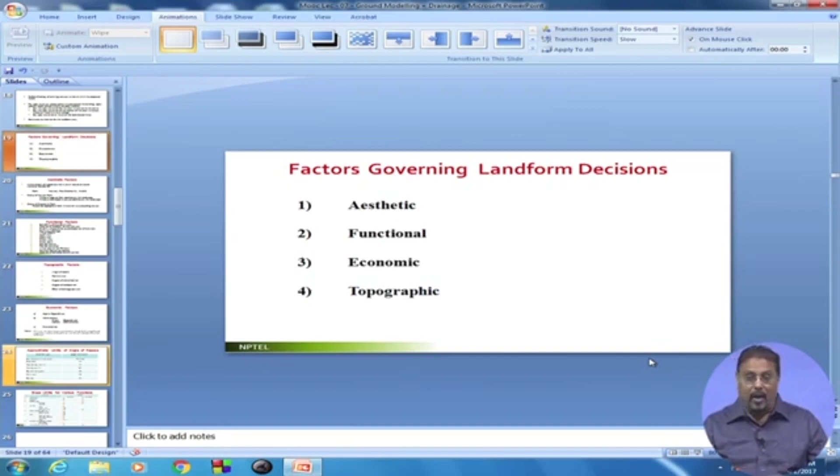But one thing is very true, that since it is a landform and dealing with the soil, whether it is functionally good or bad, aesthetically good or bad, topographic matter will definitely be one of the prime concern. And since landform means you are changing the profiles with the topographic factors, then naturally economic factor also will be very important.

Very bluntly saying, you have a landscape project to be designed which has been commissioned by a client. It has some topography which you want to change. That means you want to do the landform work. The moment you do that and you explain this pictorially to your client, he will be very happy. He will say, yes, wonderful, you please do that.

And then you painstakingly work it out, estimate the earthwork, estimate the costing of it, and then you go back to the client saying that okay, it's going to cost you about say 30 lakhs. Client will say, dump it, don't do it, don't have to do anything. I cannot spend 30 lakhs just for changing my levels. This is the irony of these projects.

Okay, the point is, let us try to understand these factors very briefly. How you handle it and what will be your fate in front of your client, time will say. But let us think of it technically and also ideally. Which factors are going to govern when you are going to do the landform decisions? I have listed this in this form, so let me go by that form itself.

Aesthetically, if you look at it, basically any landform work that you do must be based on a good aesthetic, based on sound technical foundation. It should be absolutely technically, geotechnically correct, whatever goodness we are going to give. And also I can tell you, if something is technically perfect, it also is likely to be good looking, and this is phenomenally true for anything.

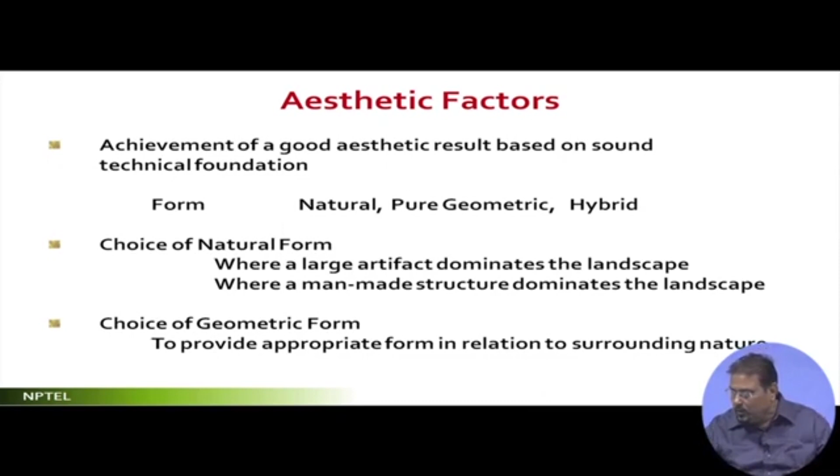Here actually in aesthetics what we are referring to is the form. There are three kinds of forms, two basic kinds. One is the natural form, that means the profile is curved. Whenever we try to explain, we say something which is curvilinear. These are natural forms. And something which can be explained through geometry is geometric. Whether it is a truncated pyramid, a truncated sloped pyramid, or a cone, whatever can be represented with geometry.

Now the question is, this one that I have drawn, which I am saying natural, can't this be geometrically explained? Yes, it could be, probably, because if you make such a geometric figure where it is absolutely half of a paraboloid, then it is geometric, no doubt about it. But the mind and the eye generally perceive this as non-geometric, so natural. If you make a pure paraboloid section over here, people will understand it is geometric. The moment you round up the base, people will start thinking it's natural.

So this natural and geometric, let's try to see with respect to perceptions. Some landforms which are very geometrically representable are geometric forms, and some forms which are maybe geometrically representable but perceptually profiled will be natural. This is a point, let us stick to it.

And there could be hybrid. What is a hybrid? Something like this. There may be a form which you have generated where you have gone like this, natural, and then straight down here, geometric. This is hybrid. Where do you see this? Nature has created this kind of thing. I can cite you an example. You go to the sand dunes, go to the deserts. In the deserts you think that all the sand is something like this.

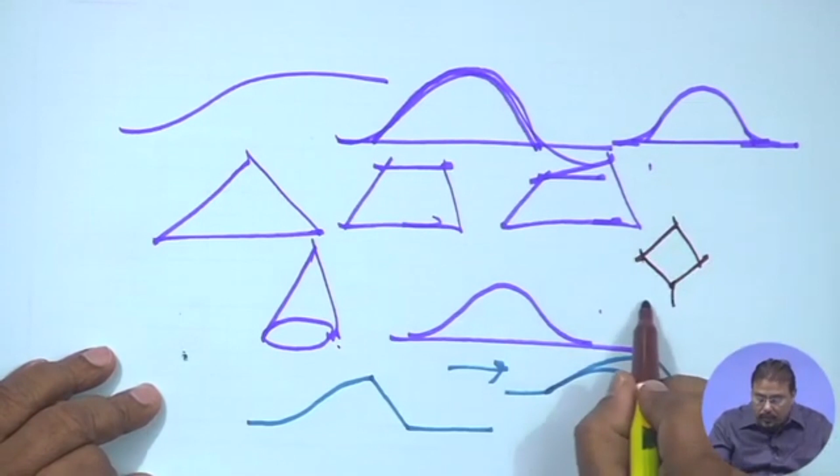Quite often you have found that if there is a very geometric artifact which you are trying to accentuate, then it is always better to place it on a natural form. Or suppose you have natural profiles to be placed in your landscape, then it may be preferred that you put them on a geometric form. An example, let me tell you. I think I should draw here itself so that it remains. If suppose you have a cuboid to be placed as a sculpture, then if you do a geometric form, it hurts. What is preferred? The cuboid, because it's a very geometric form, and you negate the effect of this with the natural form.

Contrary to it, if suppose you have a profile, a sculpture like this, and you are trying to place it over a natural form, I won't say it's conflicting, but people would have preferred that accentuating this with another natural form is not very positive. So what is preferred is that you place it over a geometric form; it gets accentuated, it gets more focused. This is a very common thumb rule which you can use, now you decide. At the same time, I won't say this is a very strong recommendation, but this is as we have understood from people's perception.

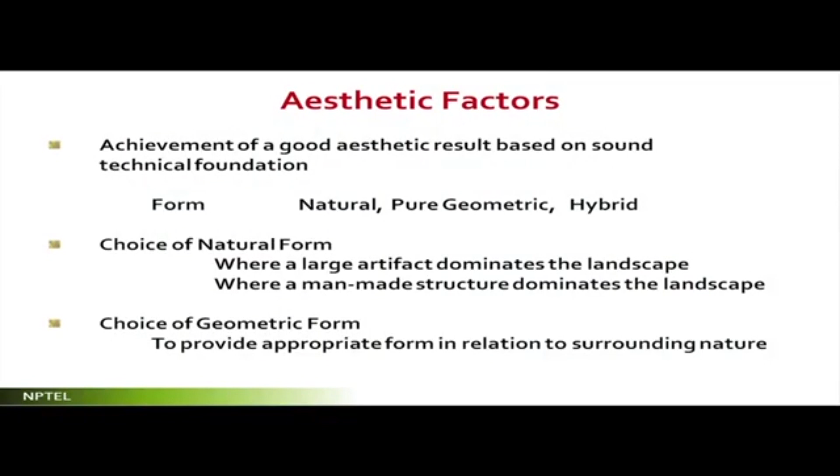Then comes functional factors. In the functional factors, I have given a series of lists. I am just reading them out one by one, and I am going to give a very brief description, because each one of them can be discussed for a good length of time. The functional factor which is going to govern my landform design is suitability of the site for its use. That means stabilizing the site, changing the slopes. These are all functional factors, nothing to do with aesthetics. Aesthetics is additional if you get it.

So suitability of site for its use, creation of landform for multiple use. That means you are creating such landforms, such profiles, which you can use for various things. There may be a place which is going to hold the water as an edge of the drain. At the same time, the top is for people to walk as a promenade. So all these profiles are functionally going to help you. So when you think about landform works governed by all these four, take note of each one and which is best fitted for this particular project. Do that and also cross check with the rest.

Stability of ground for accommodation of function. This is for the strength. The suitability of site for its use is in terms of placement, and the stability of the ground for its accommodation is in terms of strength, bearing capacity and all that. Then facilitate drainage, which I said is a very essential thing for our work. Visual effects, how it looks, aesthetics. Open view means the landform activity is functionally true for opening a view. That means if you have some landform which is obstructing your view to the other side, and your visual analysis has indicated that the other side has a good view, now you want to remove it.

The moment you remove it, this becomes open view. A very simple sketch of this is, suppose you have some element on the other side which you could see, but you are not able to see. The moment you break it, this part is removed, you have opened the view, and now you are seeing something. Okay. So, this is the opening view.

The contrary to this is closing view. Suppose you have some site from where you have some unpleasant visibility to something which is not within your site, and you want to stop it, or maybe within your site but non-conducive from this particular side, then you make a mound, close it.

Directing view: basically I am drawing in plan. Suppose you keep on making mounds like this, and now you put somebody at this particular point to view it. What will happen? The person who is seeing this in plan will see the projected surface of this and this, and also the projected surface of this.

The moment it is generated in the image of the person, then automatically, by obstruction of this, the whole view is going to be directed. So, if I take a test of people on their perception of this, they will say that when they were looking at it, the whole thing appeared to be directed towards this. Okay. So, this is directing view.

Now take the same thing for directing path. The moment you find that the mounds are turning like this and this, and the other mounds are turning like this and this, automatically you will perceive that there must be a path leading to this. So, directing path, directing views, closing views, open views, these are all functional aspects of the landform.

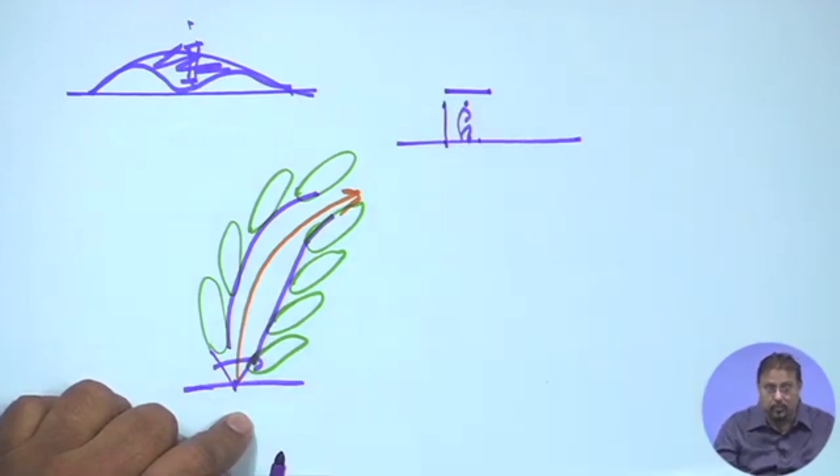Provide shelter. I will try to cite it another way. Suppose somebody is standing here with nothing around; he has to have a feeling of shelter. The best possible way is to have something above. You remember the behavioral things I was talking about. If this is not possible, then something on the side. If this is not possible, maybe a mound. This will work. This will give a feeling of shelter.

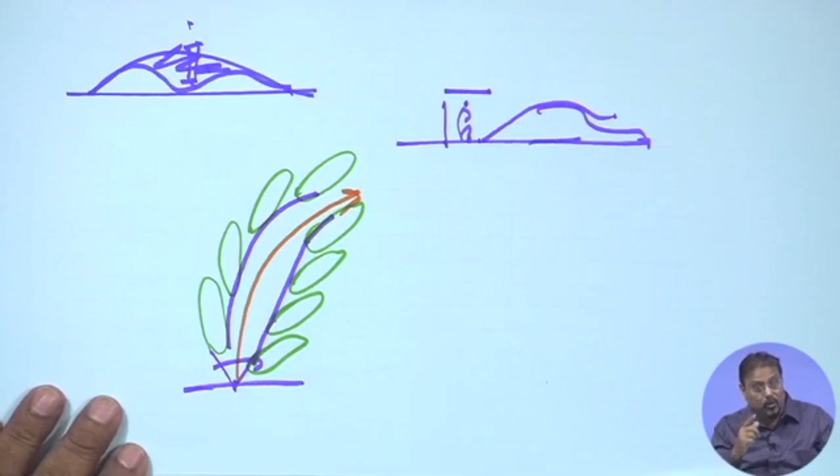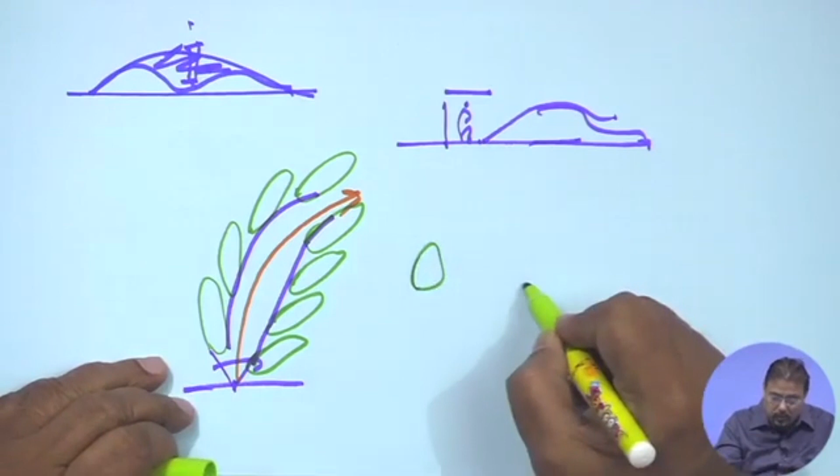That means I have a shelter to fall back on. Actually it is sloping upward, but still the mind perceives it like that, through the sensation, perception and intellection process in which the user perceives this as a shelter. Then provide seclusion. When there is one function here, one here, another here, and you want to separate them, you can always create a mound in between. So, these are all different functional aspects of it.

Then visual protection for privacy. I will cite one very interesting example. Suppose you have a hotel with a swimming pool, and people are using the decks for sunbathing, but they don't want to be seen by others on the other side. Suppose the property ends here and there is a road here, and nobody wants to be viewed from there. A very simple solution is seclusion.

What is the seclusion that you will do? You will just make one mound, and the mound height should be just above the eye level. Once you have done this, automatically the visibility of this particular area is stopped. So, it gives privacy. You can always do this in different forms.

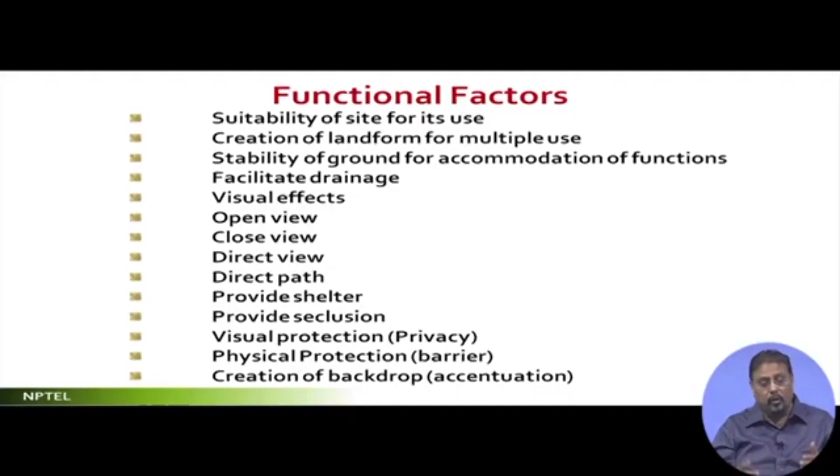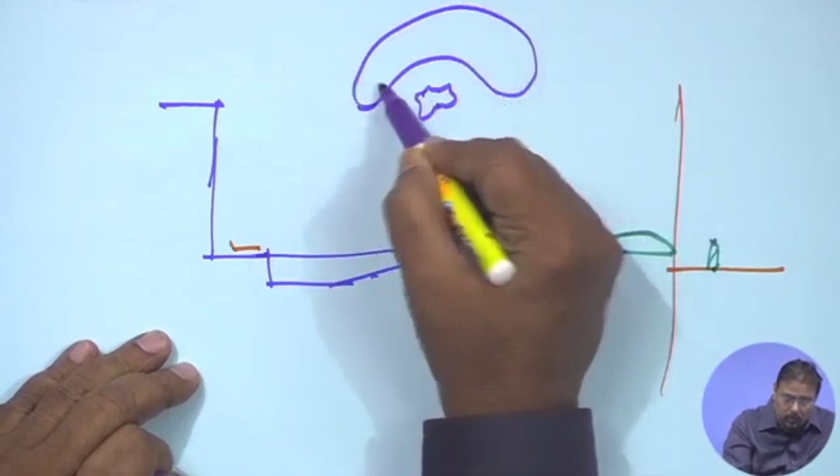Physical protection as a barrier means you are now making the mounds a barrier, so you cannot cross over. And creation of the backdrop, which is something like this: when you have some objects over here which you want to highlight with the mounds. I am always citing this landform as mounds because that will be best perceived like this.

With this, the moment you look at it in a view frame, you will find that this is the object and then there is a mound at the back. This gives you a kind of backdrop which accentuates. This is how you have to look at it in terms of the functional factors.

And once you understand this, you can always also start analyzing different examples that you are seeing yourself around you, which I am not being able to see. So, you try to correlate this with respect to that.

Next is the topographical factors, in which few things are very, very important. One is the angle of repose. Angle of repose is the angle that is being generated between, if suppose, the best way to understand this, if this is ground and you pour the bulk material, the loose material, you keep on pouring. Once you start pouring, you will find that this is going to take a shape of a similar kind of

geometry. And once you do this, and if it is loose materials, by virtue of the size, volume and the profiles of this, automatically there is a generic angle that is created, and this angle is generated between this. This is the angle which is the angle of repose.

The best way to understand this is, have you seen the sand clock? Sand clock, if you put it, you will find that once from the top bowl the sand is falling in a line and it makes a sort of cone at the center, and you measure the angle between the horizon and this and turn the clock and see again, it is again making a cone. Measure, it will be identical, and this is a phenomenon.

So angle of repose, why you have to understand, because in case you are using the bulk materials or loose materials, in such cases that angle of repose will be very much active, very much required. And most often what happens in your landform work in terms of materials is that particles are being held by two things.

One is by cohesion between each other in conjunction with many other intermediate materials, whether it's water or other organic components, or by friction. That means one particle is falling on the other and not being able to move by friction. So the cohesion and the friction, these two are very important parameters to be seen in the bulk materials, that means in loose materials.

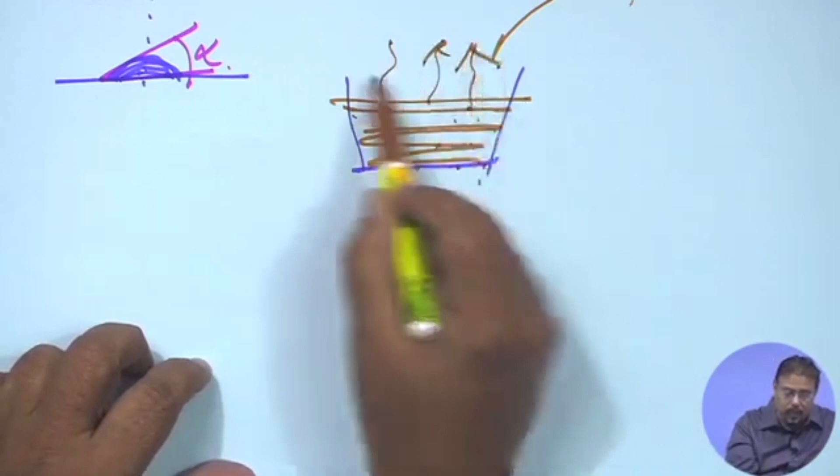So once the water is trying to replace and doesn't get any egress out, this air will be almost trying to come to the upper level, and then after some time it will just come out. And another thing is, if suppose you give heat to this, you will find that this heat is heating this particular surface, and by conduction this heat is ultimately transmitted to the end, then the air in between the air spaces will also come out, and also the water will evaporate.

So when this thing is happening, the water and air is trying to escape from this. And secondly is the self weight of this particular material, one layer over the other. So the first layer, second layer, third layer, if you start putting, I am showing you into a basket, but in the real scenario it is naturally being done.

First layer you put, it will leave it for one season, the rainwater will fall on this, and the air temperature or the solar radiation will evaporate the water, and once the water is evaporated, then the air spaces are there. Air voids which are being created now will be displaced with the higher heavy particles above, and once the particle is displacing, the air is coming out, so it is now filling up all those interspaces naturally in the natural process.

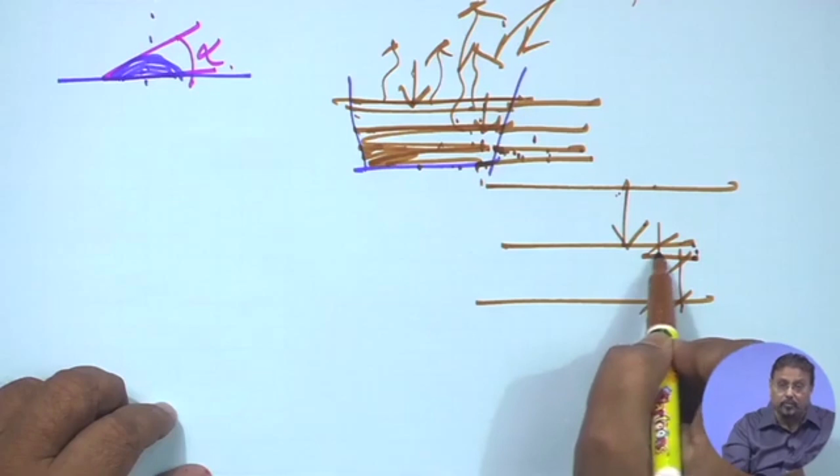Then when you are putting the next layer, the same process is happening over this. If suppose originally you have found that this particular layer was of this depth, and if you could measure, then when you are putting the next layer you will find that the depth probably will be reducing a little bit. Now this is the displacement which will take place because of the additional weight that is coming over here, because this is no longer susceptible to any kind of evaporation of the water, because that has happened already. Now this height is going to reduce here.

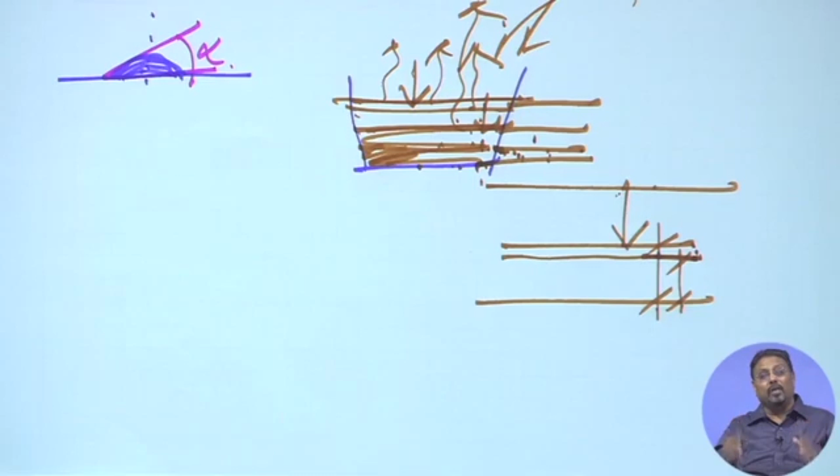So what happens is, if you are working in the profession, you must have seen that when you take earth fill or sand fill or such kind of filling, in such cases you try to measure the volume in its consolidated position. If you take the volume in the loose position, then you are a loser, because you want to fill up this much and you have considered this as a volume, and from the supplier you got so much of volume, and by consolidation this is going to reduce.

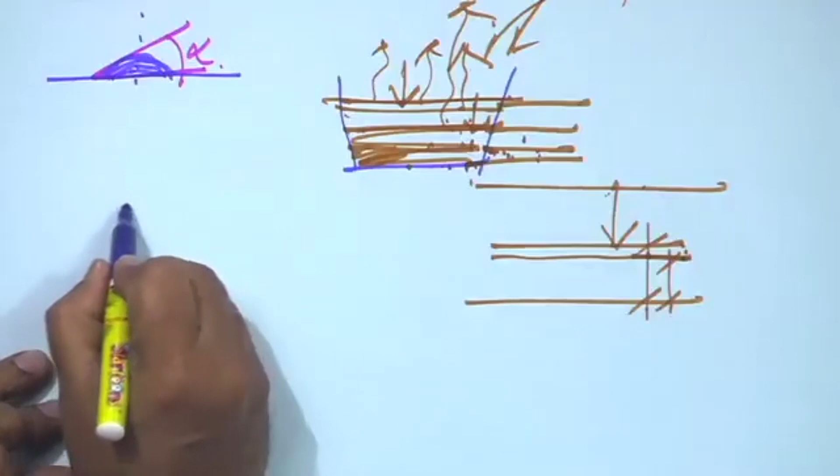So you could not match your volume that is to be consolidated. So you are a loser. So at that point you always consider the height or the volume when it is in the consolidated form. So now let me very categorically differentiate between these two. Consolidation is a natural process. Never forget, consolidation is a natural process.

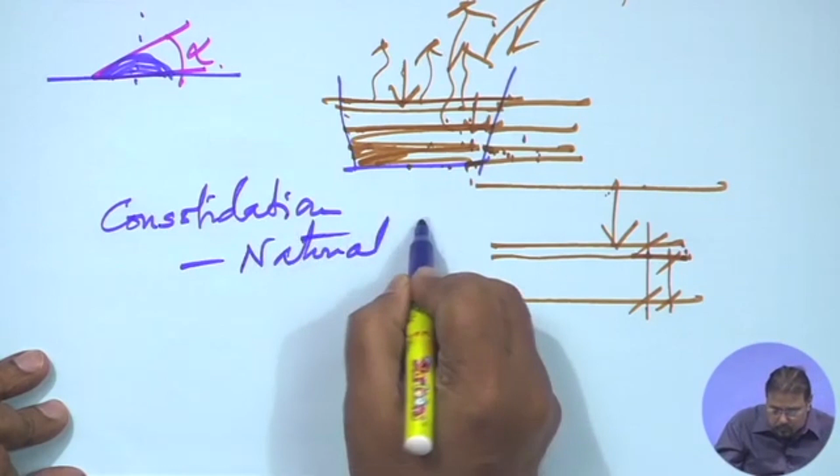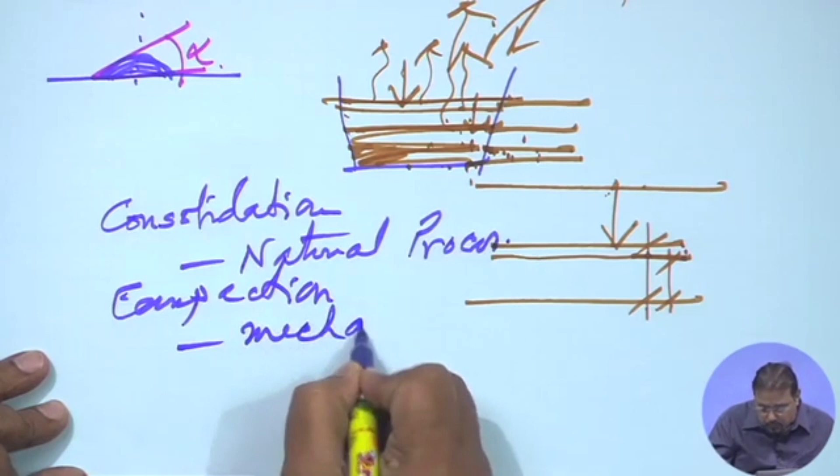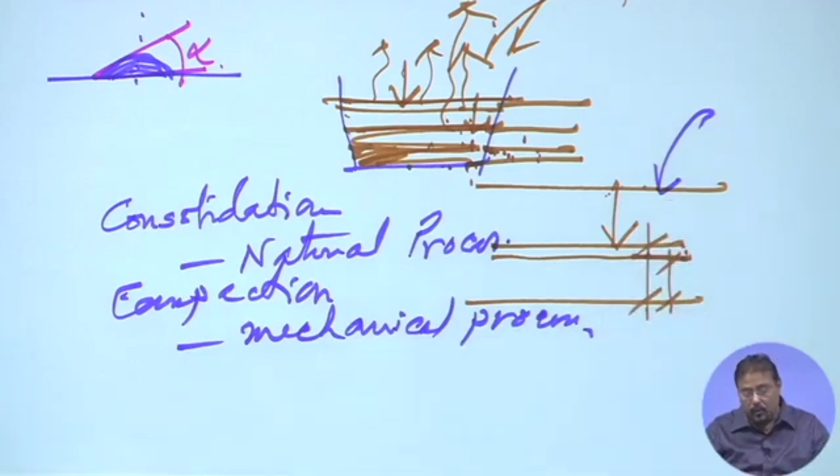And what is then compaction? Compaction is a mechanical process. Here you are trying to put pressure on this particular soil with some external devices, whether it is by bulldozer, steamroller, diesel roller or something like that. That means you are trying to put pressure, even with the usual handheld tamping gadget. There is something like this. You must have seen this kind of tamping gadget. You have to keep on pressing.

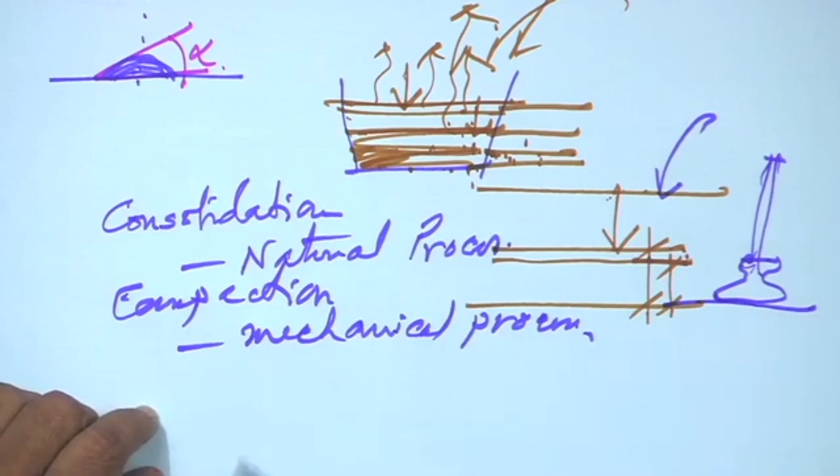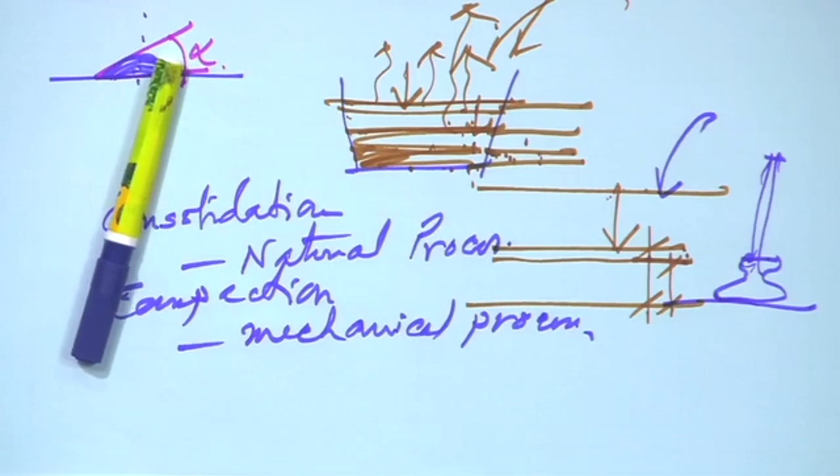Basically you are putting pressure on the upper layer, and the upper layer is now putting pressure to the lower layer, and in between the air spaces and the water spaces are now being replaced with the small granules, and air and water is escaping. If this was the original layer, by tamping or by rolling, this comes to be the finished layer, and by then this has reached a compaction level.

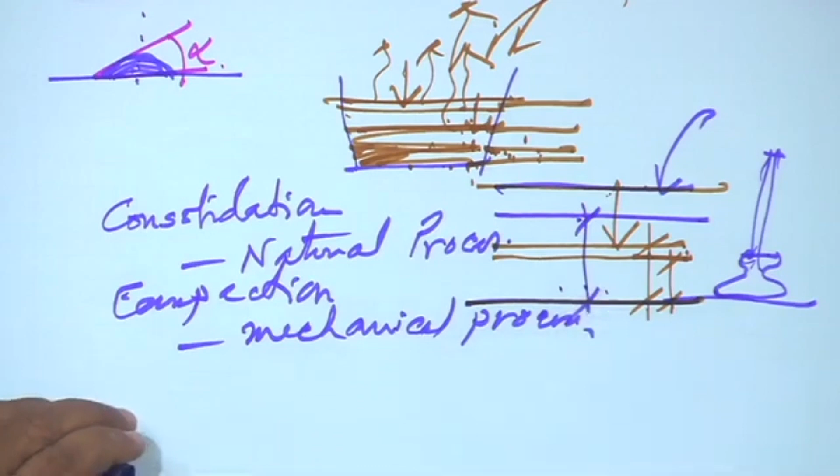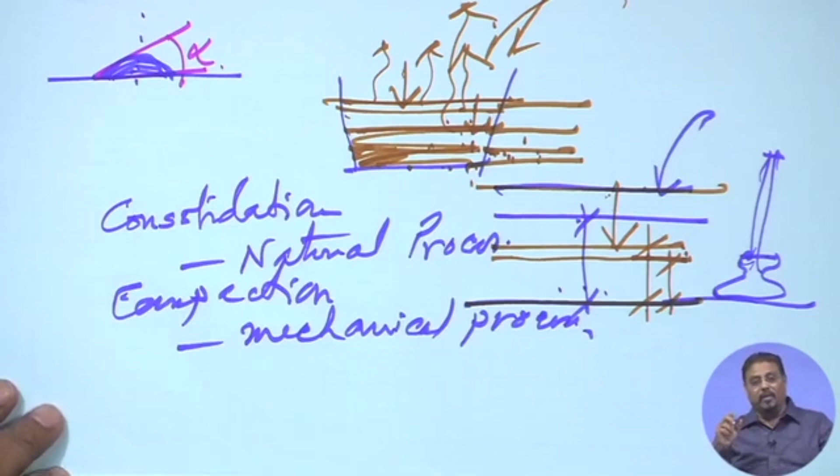And there are measurements, there is something called the Proctor compaction test. By this Proctor compaction test you can measure: after you do this with mechanical devices, you take a sample soil and see what is the compaction level that you have received, and if it is about say 95% or plus, then you become very happy. Okay, this is a good compacted soil. And if you find it is lesser than that, then you must know that your mechanical devices did not work properly, or it has not been done very seriously.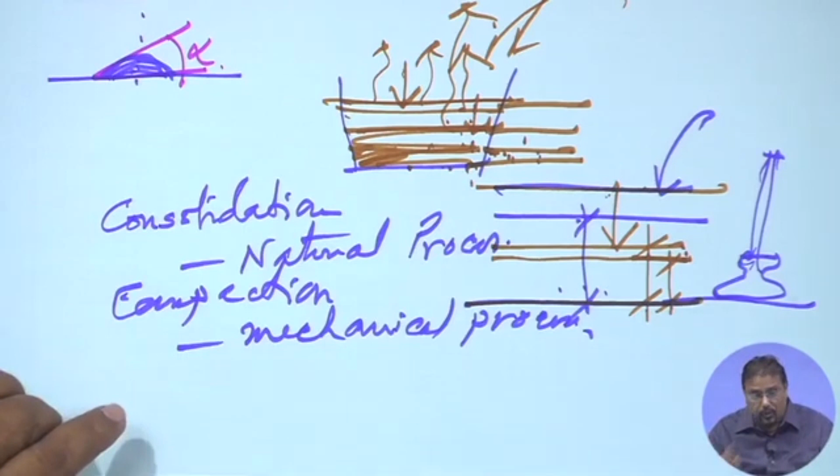So I can also tell you one thing: in the compaction process very quickly you can always achieve your compaction to the desired level, but the consolidation process takes time, because you are leaving it to the nature, the rainfall, the sunrise, sunset, the solar incidence, rain incidences. So here two things to be noticed. In consolidation, it is a natural process, so it takes a long time, and since you are not using mechanical devices, the cost is less.

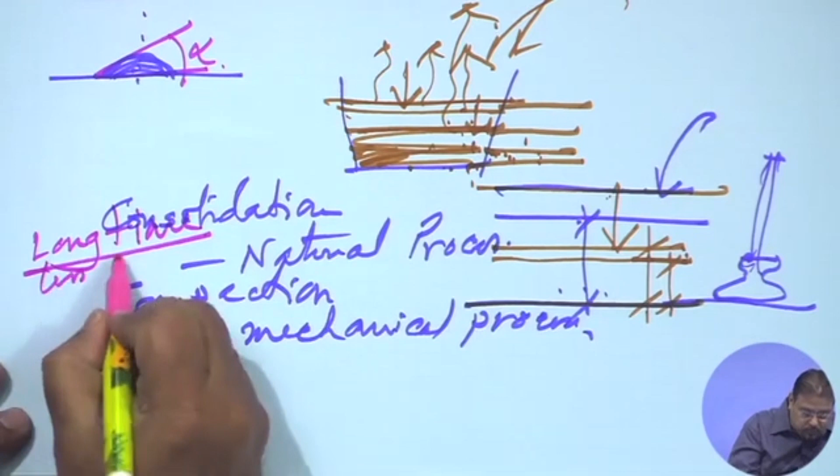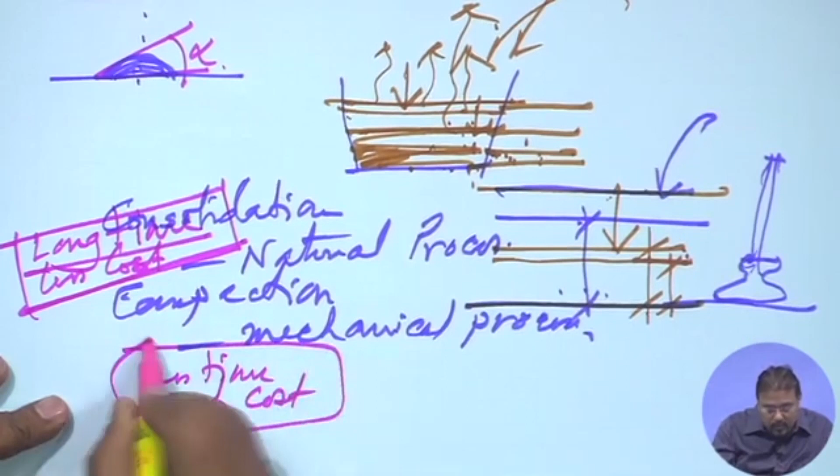That is for the consolidation thing. In this compaction it takes less time but high cost. Now, these two are contradictory, isn't it? But still you have to take a call. Would you like to go for this or like to go for this? Now, let me give an argument based on which you will decide.

Suppose the project has to be commissioned very fast, you do not care for the cost, because the cost will be recovered from the clients, then you go for this compaction. Quickly do it, compact it and sell it off or set it off. In such cases, within the less time you use, even if high cost, the higher return will be coming, whether in terms of revenue or in terms of utility.

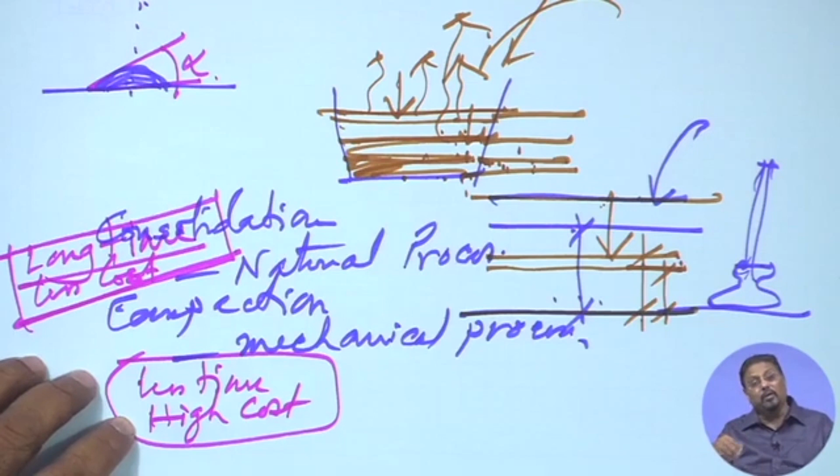Another thing, when you go for such kind of compaction, if it is too large a domain where you have to go for compaction, then it becomes really cost ineffective. And if it is a very large area to be compacted or consolidated, it is always better to go for consolidation. It is because of this, for road embankments, rail embankments, wherever new rail routes or new roads or highways are being constructed, generally they prefer consolidation.

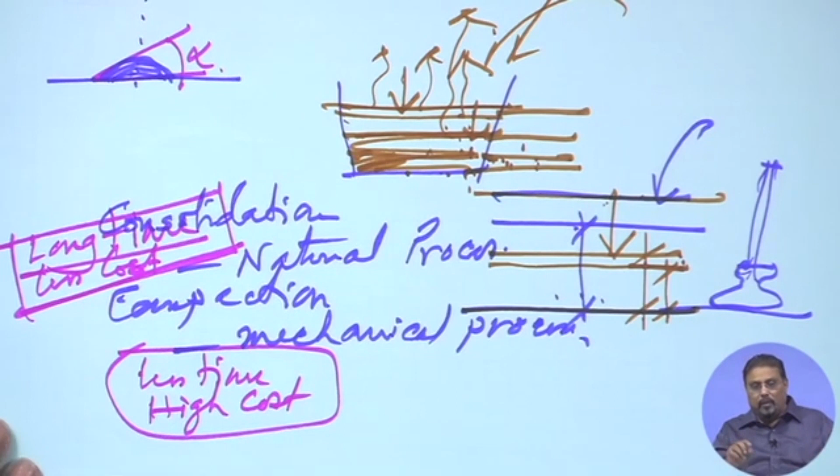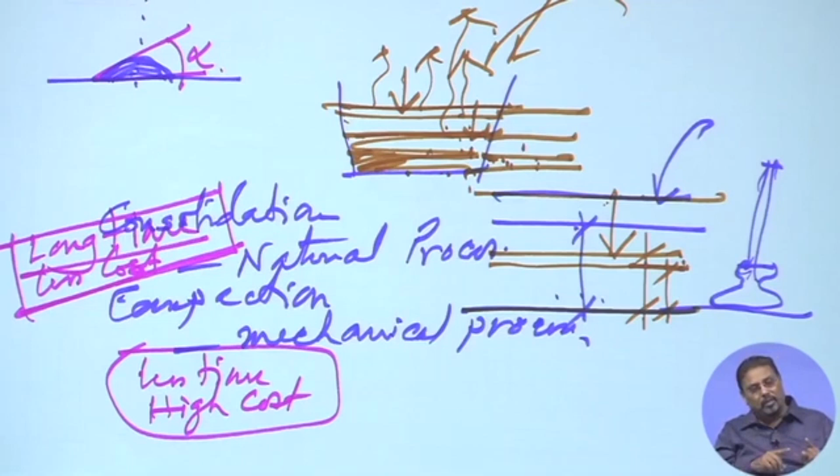What they do is, let us mix it up. For such larger chunks you go for consolidation, so wait for that time, but when it comes to a certain level which is consolidated enough in terms of strength, then for the top layer you go for compaction. So, it is not necessary that if you follow consolidation, you have to go for consolidation till the end. No. So, this is how you really work it out. So, what is the degree of consolidation, what is the degree of compaction that is required? That is going to be your guiding factor, and also the effect of drainage pattern.

Effect of drainage pattern is like, suppose you have the soil and the topographic factor is it has certain slopes and the drainage is passing over this, then it definitely will be subjected to two things. One is the superficial water erosion, another is the undersurface creeping erosion. Creeping erosion is basically destability; this is what I was citing in our Sikkim cases, where maximum landslides

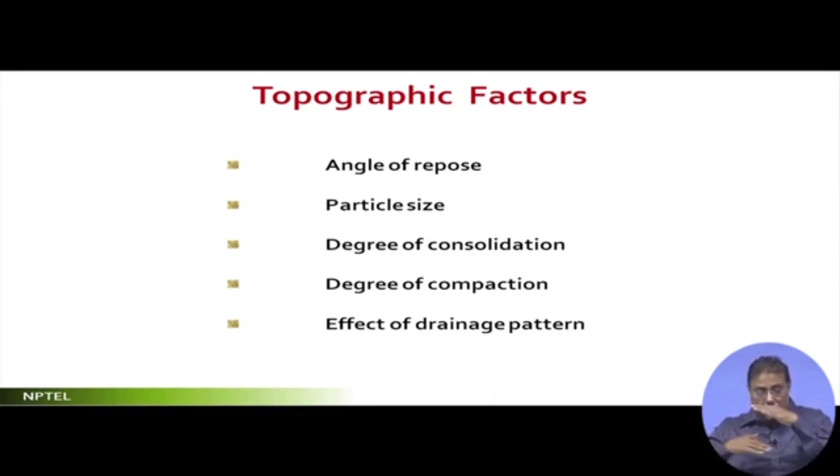you do find where the slope is such that the water is coming in and ultimately destabilizing the undersurface of the soil, and it is not the top surface only that slides or glides, but the lower portion got destabilized. The top portion is not destabilized by the water flowing over it, but the lower portion has got destabilized, and once this gets destabilized, the whole bulk at the top rolls out. This is how the whole thing happens. So topographic factors you take into consideration, and then is the economic factor.

This is something which is very critical, because at the end of all, whatever you do, it costs. So there are three things to be seen. One is the capital expenditure, the first expenditure that you are going to do, and there is a maintenance expenditure, and in the maintenance expenditure there is a direct expenditure. That means, when you make the landform, you incur the capital expenditure, but to keep it retained in the shape or the profile that you wanted, you have to do some bit of work every year, some maintenance work. So that direct maintenance is going to be an expenditure.

But what is very important is to also notice if there is any indirect expenditure that you are incurring or you are compelling them to have. What is that indirect expenditure? Let me explain. Suppose you have made a mound which is of a certain slope, and the slope has to be maintained, and to maintain this, what you could have originally achieved with a machine, now you are not able to. So you have to have more manpower, and the more manpower you are incurring mainly because of the inconvenience that you have created because of this slope.

So the indirect expenditure is connected with the inconvenience that you have created by changing the profile, and this cannot be disregarded. I will tell you, most often this becomes a real menace. We don't realize it; it looks so good, we have done it, and the direct maintenance is also possible. But the thing is, in some portions that you have done, the indirect expenditure becomes higher. So in such cases it fails.

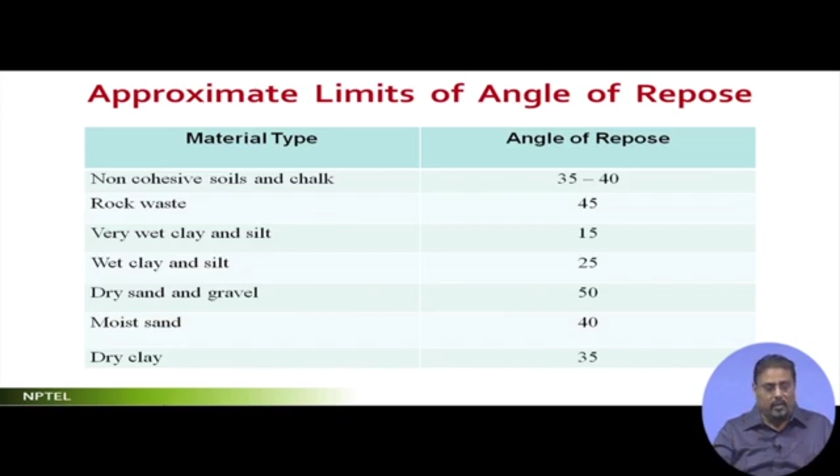Here, I will just keep this slide for a few seconds, just to give an idea of the different materials which are used for landform works: non-cohesive soils or chalks, rock waste, very wet clay and silt, wet clay and silt, dry sand and gravel, moist sand and dry clay, and they have their standard angles of repose which are less variable. I am keeping this slide for a few seconds so that you read it, reread it and try to understand it, but I am not going to discuss it.

Now, based on the project and its objective, you have a list of functions, and each function has some maximum and minimum slope limits. The maximum slope limit is basically how much you can go up to in terms of steepness, and the minimum slope limit is essentially connected with the drainage requirement. That means it must have a minimum amount of slope so that if water falls on it, it drains out. It should not get collected there as a sheet of water.

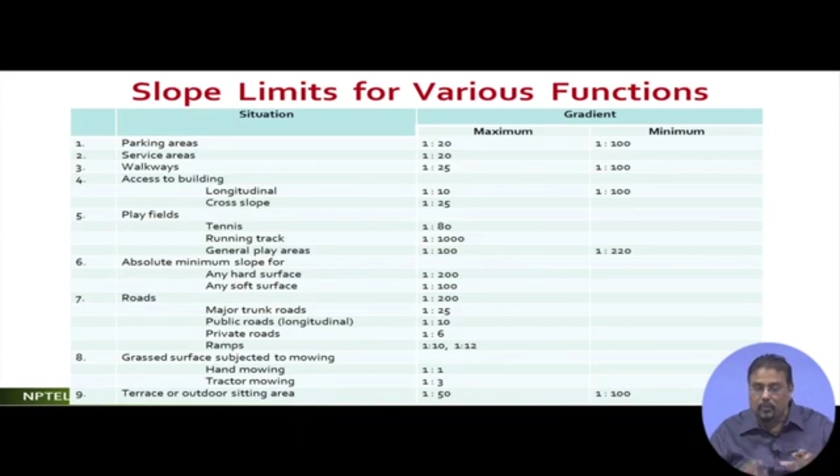So, how you use it: you can extend this list from other references as well. I am just giving an idea. You take a list of functions that you want to accommodate within your site, and then find out their minimum and maximum desirable slopes, and then when you place them, see whether they match the slopes where you are placing them, because the preliminary or prima facie placement of functions you have already done in your slope analysis.

Okay. Now, you do a little bit of modification in local areas, and then ultimately decide what kind of levels you are going to give. So you will see how landform design becomes so very technical and so very constructive, because ultimately you have to instruct the contractor the way you want it. Okay. I will discuss this a little further in my next lecture.